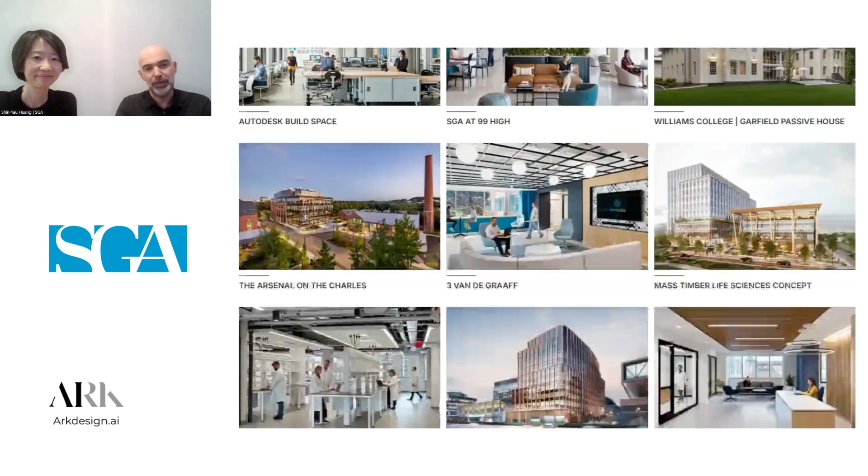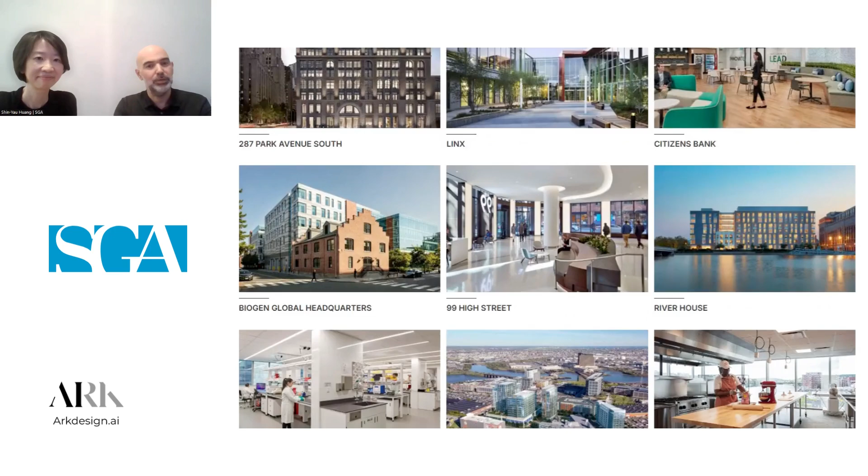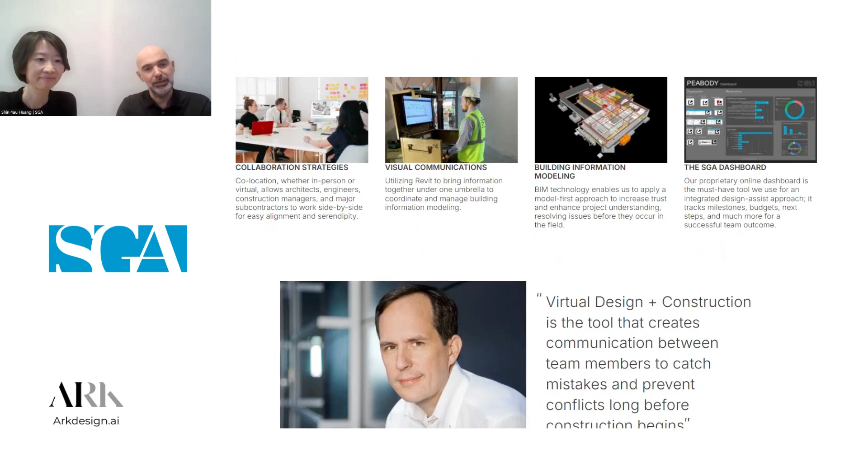We are very proud in terms of being very innovative in project delivery, using and utilizing all the technologies, and being at the forefront of using BIM in very complex projects, especially when it comes to designing labs, which are very heavy in terms of coordination and MEP aspects. To the point that the company has developed a proprietary system called virtual design and construction, which brings decision making early on board and delivers projects in a way that it's modeled almost to the T, so that whoever looks at the rendering knows exactly what they're going to get.

A little bit of my history - I started practicing architecture here in the US since 2001. I've been in practice in different practice areas, from mixed use, large scale and master planning, to residential developments, almost all around the US, and a little bit overseas as well.

I share a similar thought to Reza's. I actually started my career as an urban planner and designer, looking at the overall urban context and the planning aspect - how to build a city - and then gradually got into the architectural world.

So when designing a building or architectural project, I always have that bigger picture in mind. How do you work with the context, take advantage of the adjacent views, height, open space, public realm? How do we create something not just for the building itself or the users, but also contribute that project to the surrounding neighborhood and context? I love all these aspects of projects, and try to take opportunities, making sure we optimize the potential for our client, for the society, and for the city.

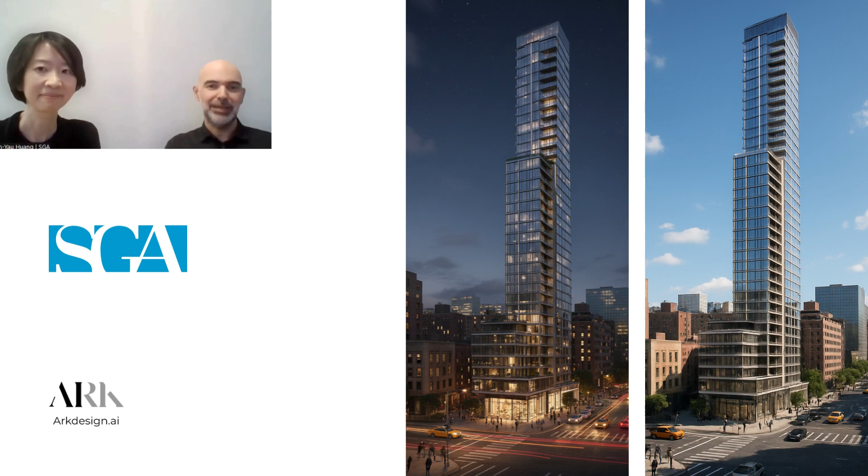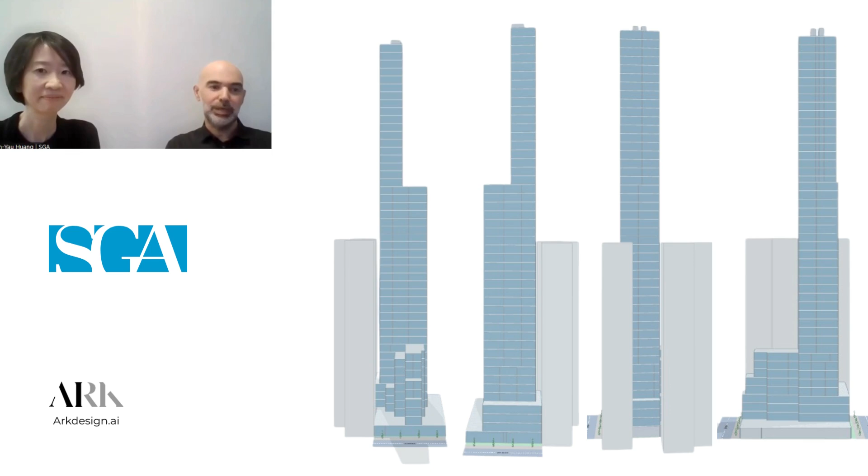We were trying to stay on the creative side of the massing, and be cognizant about where the value lies in terms of layouts, how the massing of the building is going to shape, and the access through these streets. We tried to solve the massing and the unit distribution to maximize the marketability of these units as very luxury condos.

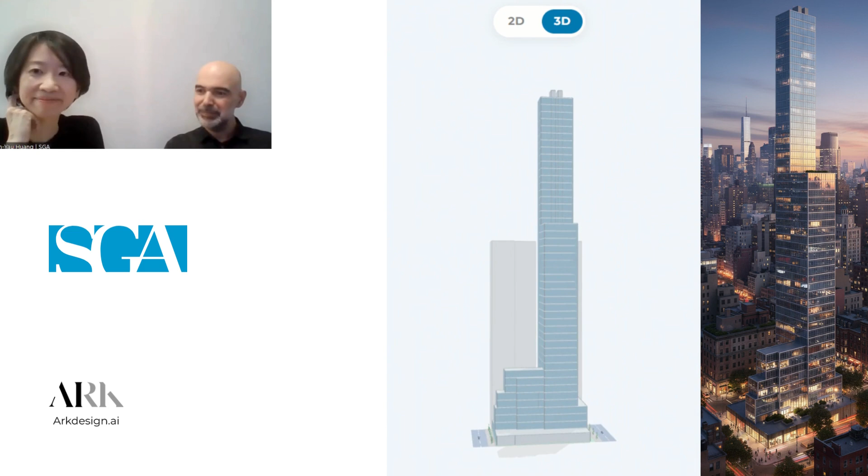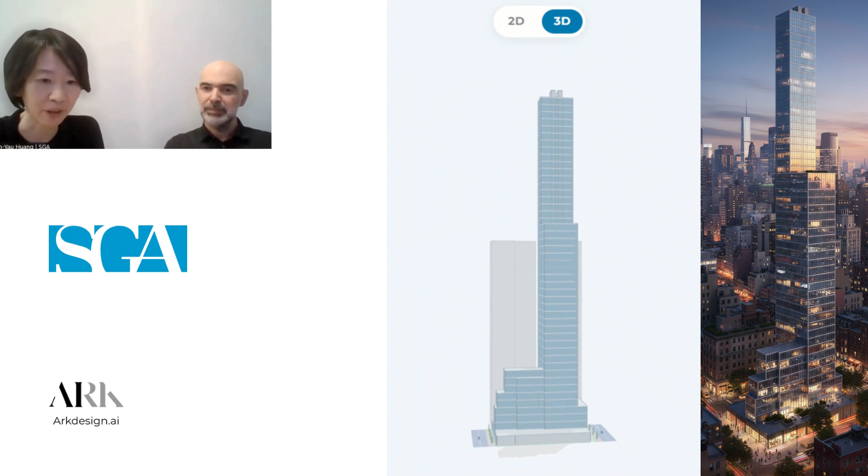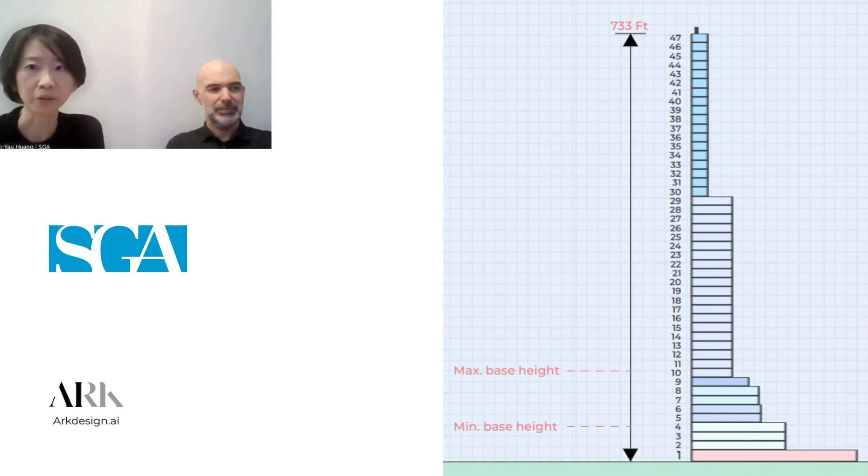And also to follow Reza's points, value creation for this project is extremely important. The client is marketing this as super luxury condos, so very large units, optimizing the views, optimizing the great height for this building. That's why we proposed a super tall tower, also with stepping down to create not just the massing gesture, but also value for the residents who will move into these apartments.

There's more value in views, because sometimes when you go above the 20th floor, most of the views become almost the same.

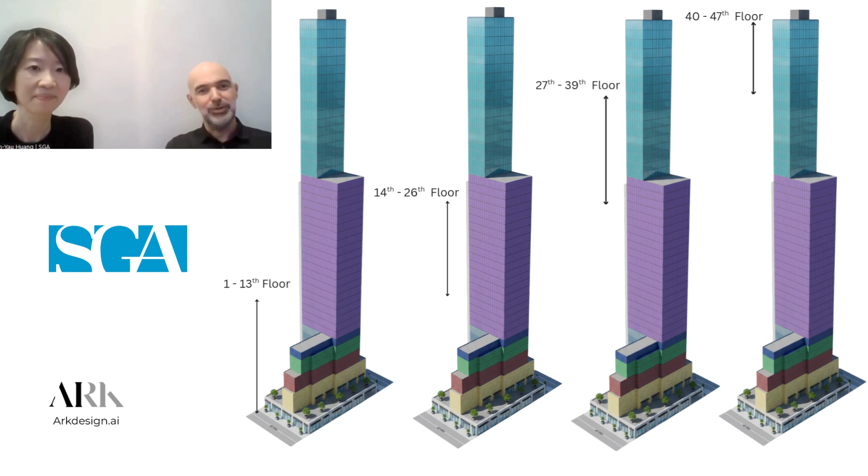It becomes sort of flat. Most of the experience happens from almost third to twentieth floor, where the views change. We're trying to provide a lot of terracing at those levels where many of these views have access to outdoor space, where there's not that much wind disturbance, while enjoying outdoor space as terraces at their units.

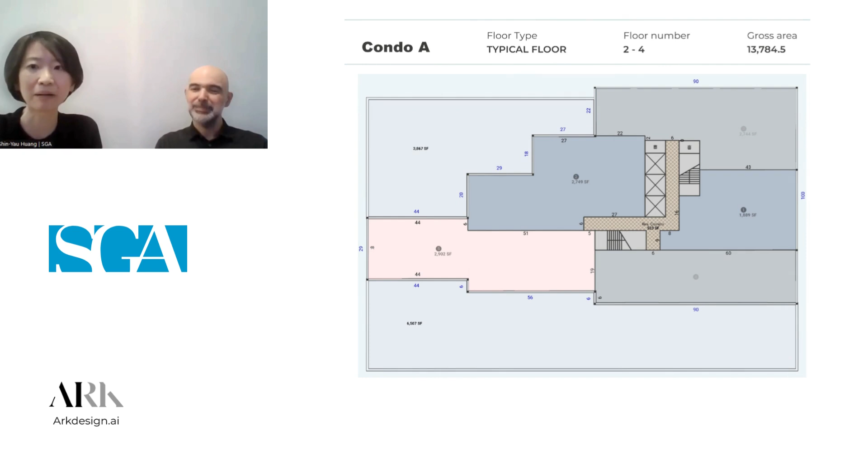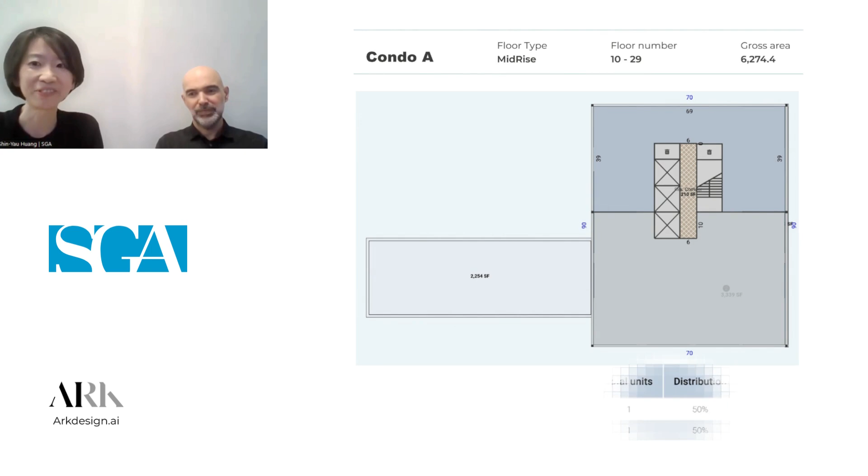We actually use this AI tool. It helps a lot to provide several options for us to choose from, but we determine the best option for the project. Again, it's to optimize the views, and to think about the modules where we could potentially put living rooms and bedrooms in this building, and actually utilize the step-down terraces for the view and outdoor space potential.

Zoning is a big challenge for the site. It actually sits in three different zoning districts, so there are limited heights and setbacks in each, and also maximum FAR in each specific zoning district. So we have to strategically make it one building, not three separate buildings, working under these zoning constraints. As a result, we're pretty happy. It's a tower with a little bit of step-down, but if we had more time to develop it further, we believe we could make it even more integrated and a better gesture for the project.

I should admit that it's a big time saver. At the same time, comparing to other AI platforms, it still keeps the architect in the driver's seat. There's enough flexibility for the architect to intervene, because sometimes if you go to other platforms, it's difficult to correct things, so to speak, because they don't have that flexibility. So I think this platform gives a balance.

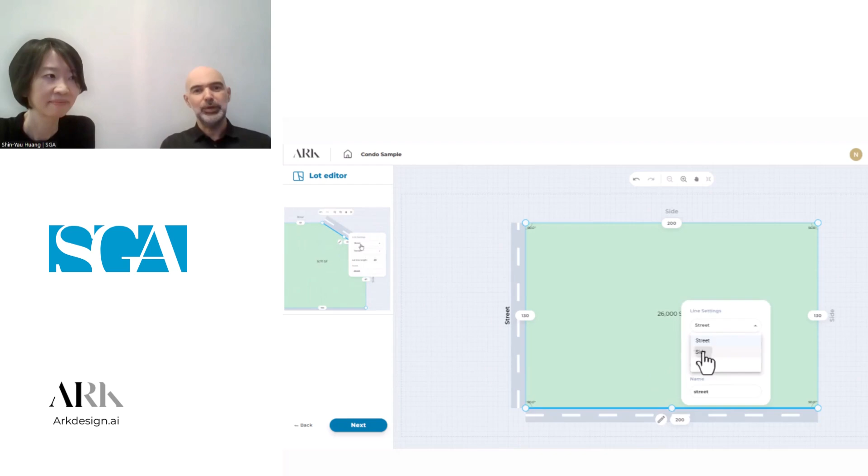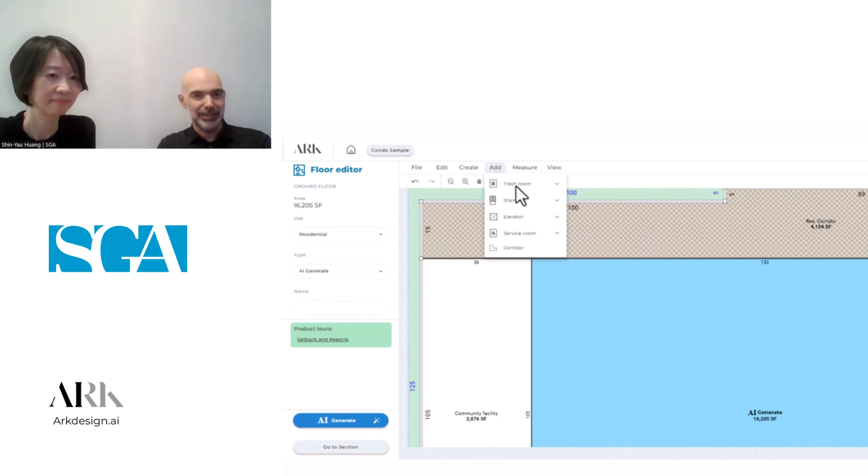The time-saving aspects of design and feasibility study, at the same time, gives the flexibility to interject the architect's or the client's expectations directly into the platform and get a result very fast. And the fact that it almost eliminates most of the time-consuming process of crunching numbers and drawing all the demising walls one by one, and provides the initial concept of unit blocking diagrams and those aspects, are really helpful in the process of doing these feasibility studies, because the amount of time that is saved is amazing.

I agree. It's actually my first time using it for this project, and for this particular project, having access to this AI platform is really eye-opening for me.

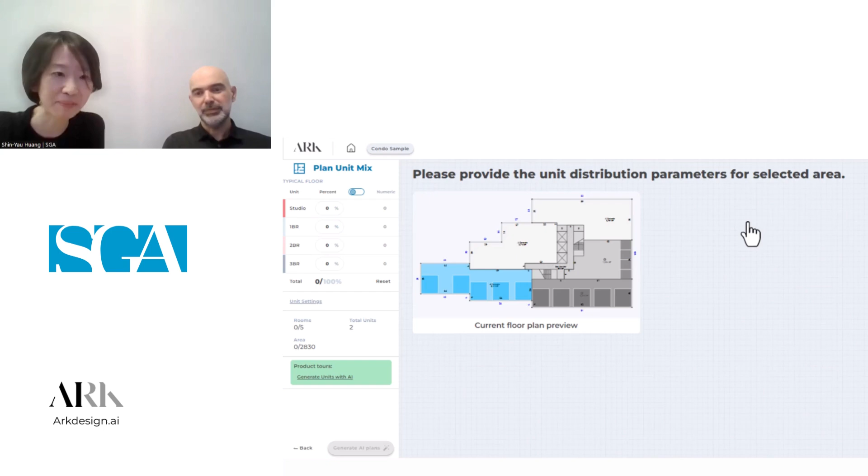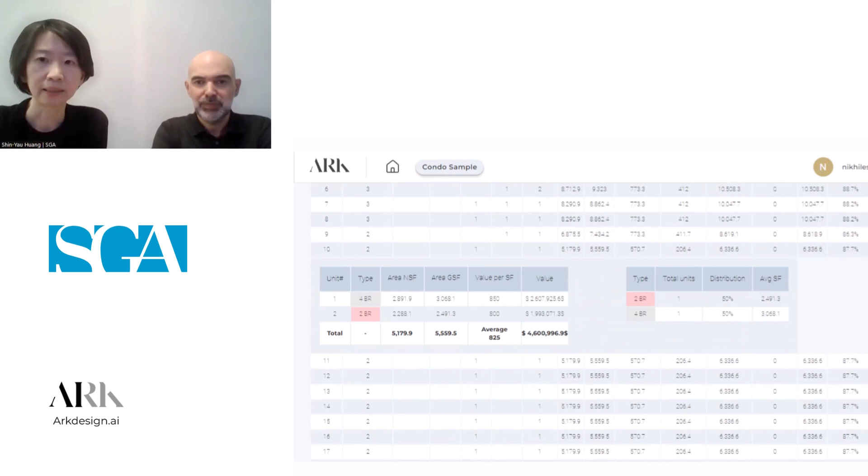Seeing the user-friendly platform, very intuitive process for the architect to manage the design process, and also seeing the summary of the product being presented in a very quick and simple way - I like the design of this platform. That's definitely a good tool for architects too. I have to add that you did a great job creating an intuitive, user-friendly platform that somebody without necessarily deep knowledge of drafting or using the software can get up and running in maybe like 2-3 hours. That's really amazing.

Architecture, unlike visual art, is not something that is going to be just a reflection of what an architect likes. It is something that has to work with the function and code and budget and time and the availability of certain materials and those things. And the role of the architect is to be able to respond to all these aspects at the same time. And that is why I think it's crucial to have not just design talent, but a talent of bringing people together.